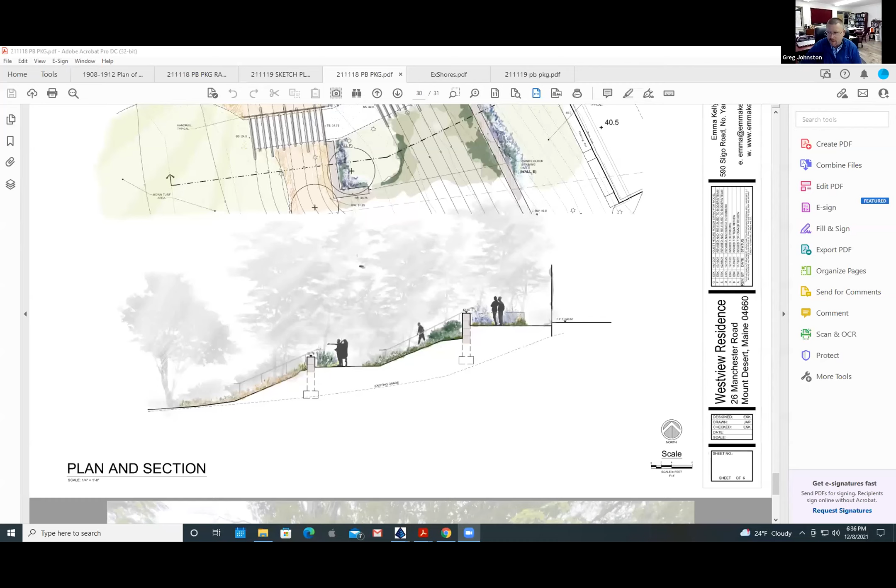Let's try that. Yep, looks good. Yep, all right.

As part of the plan, what is now a sloped area at a recently remodeled home, the general purpose is to reduce slope. By terracing, we can reduce slope, which will reduce potential for erosion, but also give some curtilage around the structure in a terraced manner.

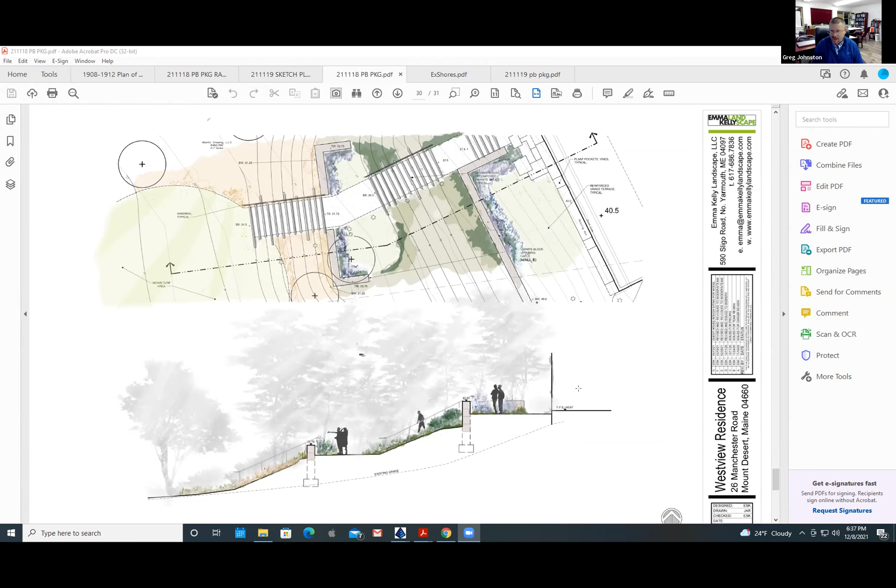The purpose we're here for is that the excavation and fill, again in the shoreline zone, requires planning board approval. The spaces also become easier to traverse by demarcating sloped from flat, and by doing so, also providing a better root base than what's there to add some native planting.

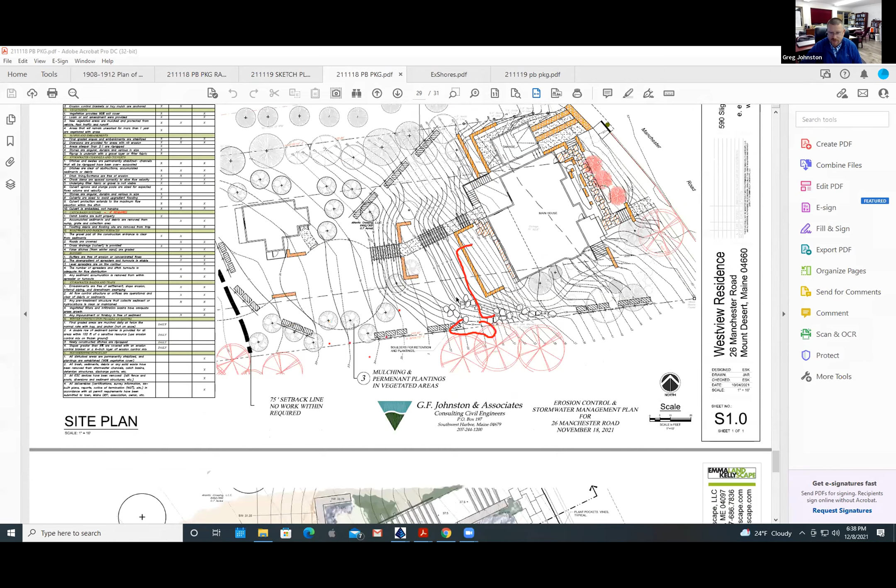And screening to increase some privacy. I'm scrolling over to what is the site plan now. You can see in orange the terraced walls we just saw in section, planted up bouldery side slope, and some screening from the adjacent property on the sides. It's the amount of fill required to accomplish it, but in the end it'll create more usable and stable space around the site.

Here's a beautiful rendering by Emma Kelly, landscape design team, showing you from probably the easterly side looking towards the west, and the purpose.

We also observed a fairly impressive system of erosion control already in place during the snowstorm. It seemed to be performing well. The bottoms of the silt fence were keyed into the slopes, and there was wood chips present. They'll continue to be diligent about those aspects, not only in installation but maintenance throughout the duration of the project.

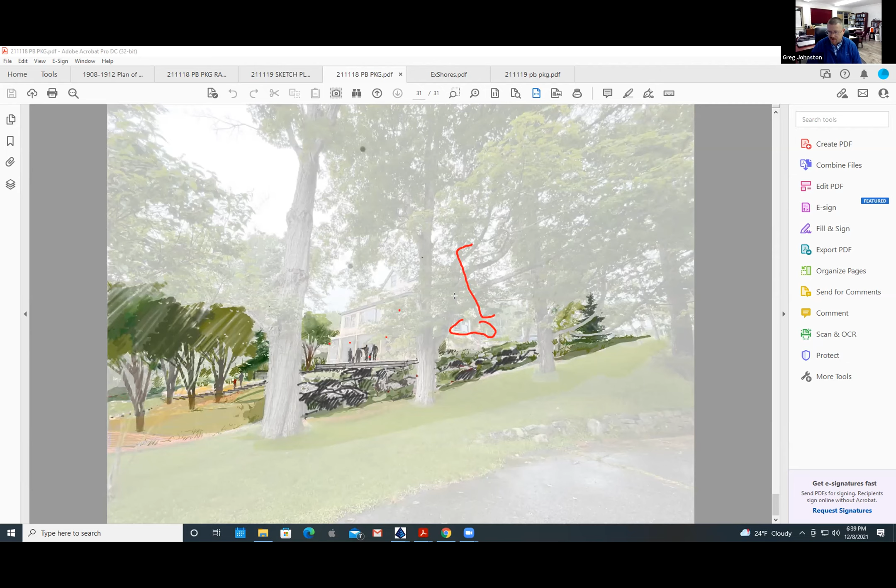Unless I missed something, I think we still need to vote that the application is complete. We skipped that. Make all other comments.

I'll make a motion to say that the application is complete. Tracy Keller. Anastasia, second. All those in favor: Tracy Keller, aye. Christy, Anastasia, aye. Meredith Randolph, aye.

And then we have to make a motion to approve the application, that will then pause. How about the public comment section? Don't we need to do that first? Well, I think that is part of the review, so we should have done this probably before. I can't remember when we did it. But I don't think we have the public review until after we are reviewing the application. No, I guess you're right, maybe we do have public review first.

So, open up to the public. Is there any public comment? Concerns, questions? Can I ask a question? Oh sure, Greg. Yes.

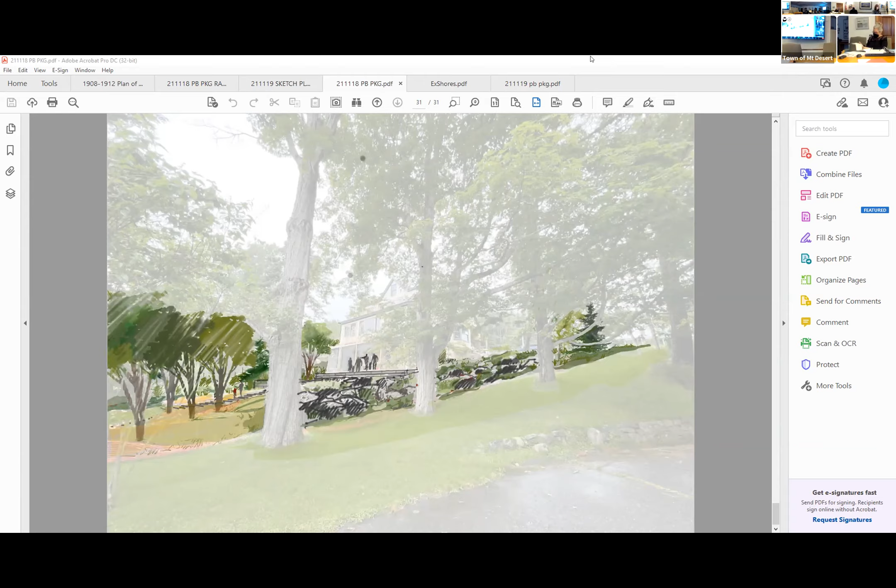So we were at, do we have any comment from the public? Any questions? Anybody else? Doesn't sound like it. Okay, so public comments closed. Do we have any more questions from the board, or do we want to vote to find it complete and then do the review, or vote to approve and do the review?

Do we have a motion? I'll make a motion to approve. Anastasia, second. Okay, let's go through, anybody want to have a vote for short checklist? Anastasia, I make a motion that we use the short form. Oh, Tracy Keller, I'll second that. All those in favor, Christy? Anastasia, aye. Tracy Keller, aye. And Meredith Randolph, aye.

Okay. So we have section 6A, 6A1, compatibility.

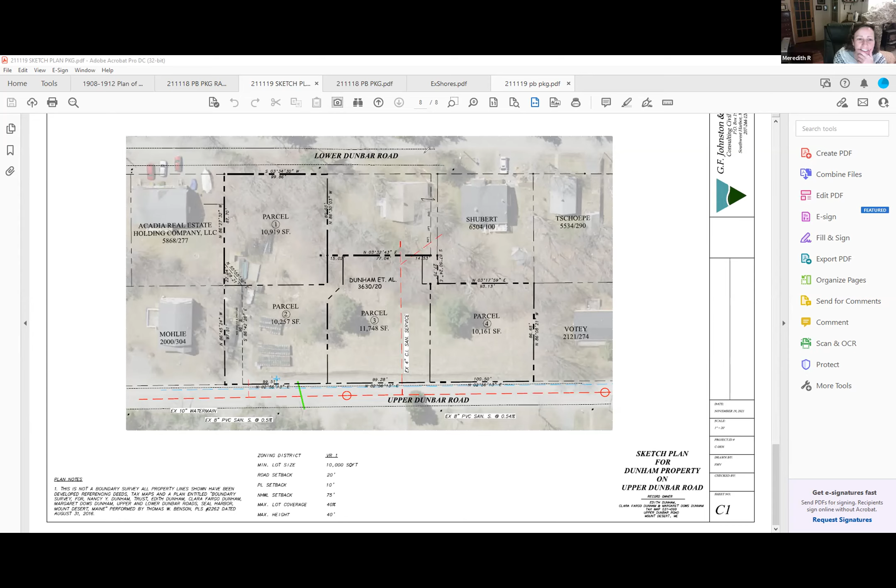So Greg, there's kind of a funny little snorkel—I was just gonna ask about that. What's the between little 1 and 3, and 3 and Shubert—there's those weird little pieces hanging off. What are you trying to get at?

So there's a desire to keep them as close to the historic orientation between the family members and the historical lines as possible. In order to keep them as close as possible, there's a bit of jockeying to get minimum lot area into the parcels, which results in some odd configurations in meeting the land area requirements. This parcel is sort of the original, yet some of the original area, which was down here, had been conveyed to this parcel—so it's more about meeting land area requirements. Simply, this line, if continued straight up, would probably not meet the 10,000 square foot increment.

Greg, was I correct in understanding that it appears to be a right of way on the south side of parcel 2, and that's how you get back to parcel 1, whereas parcel 1 is accessed from Lower Dunbar? Parcel 1 would be accessed from Lower Dunbar. This right of way is actually for sewer, shown here, that goes to this property.

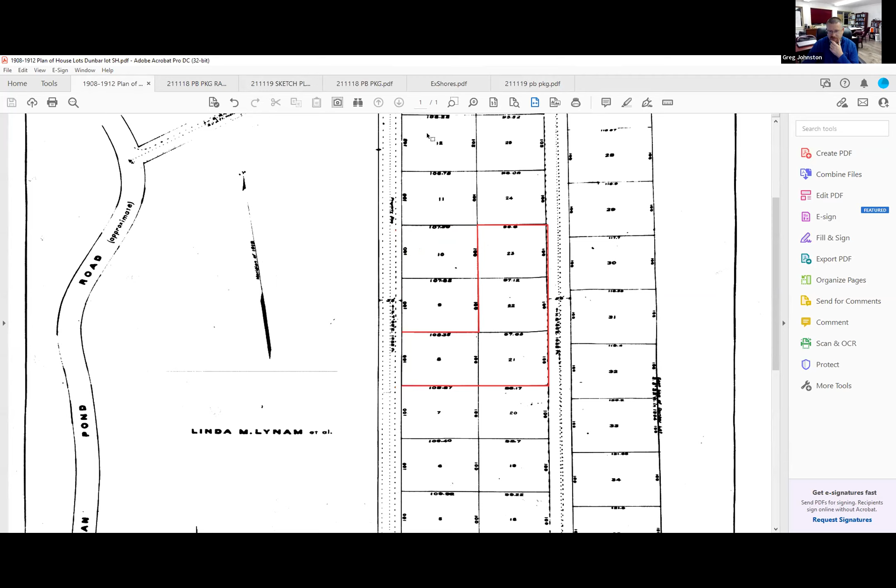So we definitely have some work to do in showing access, which is required as part of the subdivision ordinance, and stormwater management, recognizing these existing easements. But in an area where it's a neighborhood of town sewer and water, it can happen relatively consistent with what is adjacent to the properties around them, because they were historically based on this plan from 1908. A lot of the deeds in and around the properties in the area are still conveying parcel to parcel, referencing the 1908 plan. So these lots being proposed are more consistent with the neighborhood, and the large outlier 1 acre parcel is not.

So Greg, is it helpful? It seems to me that we've had discussions in the past with subdivision plans as to whether you need to be labeling the name of the property owners across the street. I think that's good. I don't know that everybody needs it, but it seems to me they're a legitimate abutter, so it needs to be clarified.

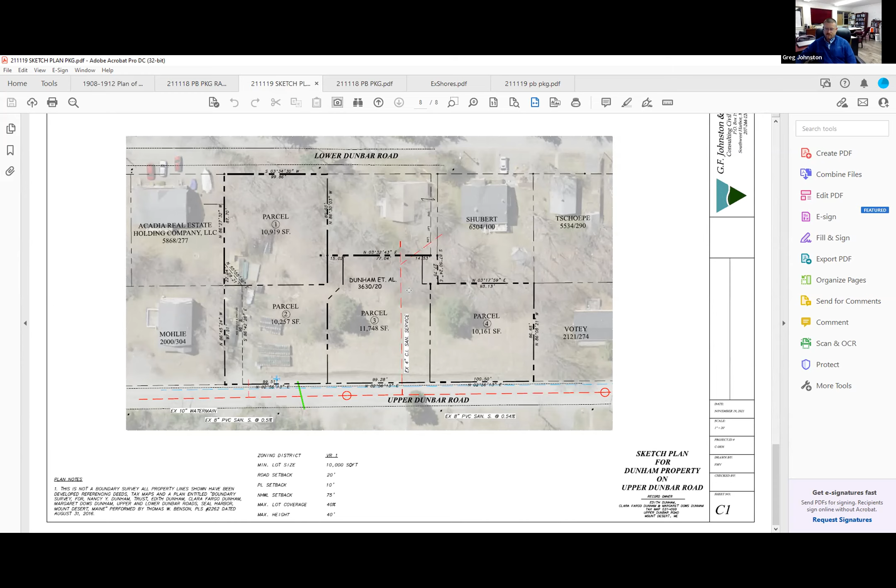Anybody else? Comments, questions? I'll ask if there's any public comment. Not hearing any, and this is how sketch plans usually play out. We just kind of generally talk about the project and continue on with the process from there.

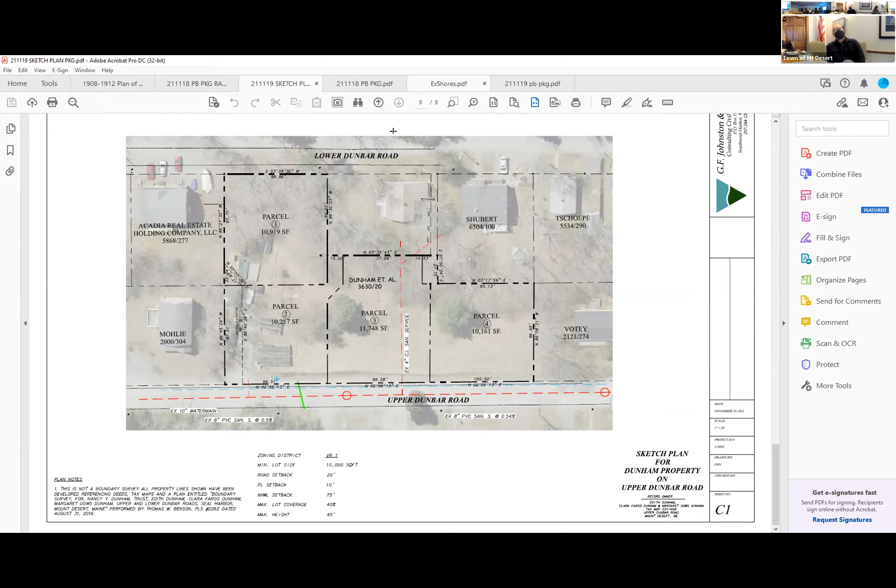The process being then completeness and compliance review, and those will be at later planning board hearings. So I feel like we're all set. Thanks, Greg. Okay, thank you.

And I think we may be seeing you later tonight still. Maybe one more time. I was told to do it in one large dose and not show back up again for the rest of the winter, so that's what I was trying to do. Got it. That's how it was taken.

All right, let's soldier on here. You guys gotta bear with me here, gonna read through this. We're on item 5 on the agenda tonight. Oh, 5, Roman numeral, okay, sorry, go ahead. Yeah, we just rounded out 4, the subdivision approval applications, and now we're on to 5.

We've got land use zoning ordinance, section 6B, lots and access. What that talks about is that no lot may be built upon or otherwise developed unless it has a private road or driveway for access to a public way by a valid right-of-way benefiting the lot, or by ownership of land abutting the public way. If more than 2 lots are accessed by the same private road, then it must meet the street design and construction standards of section 5.14 of the subdivision ordinance. If no more than 2 lots are accessed by the same private road or driveway, it must meet either those street design standards or the driveway construction standards of section 6B6 of the land use ordinance. A pre-existing primary access drive that serves up to 2 existing lots need not meet the requirements of section 6B6. All lots must maintain safe access for fire, police, and emergency vehicles as determined by the fire chief.

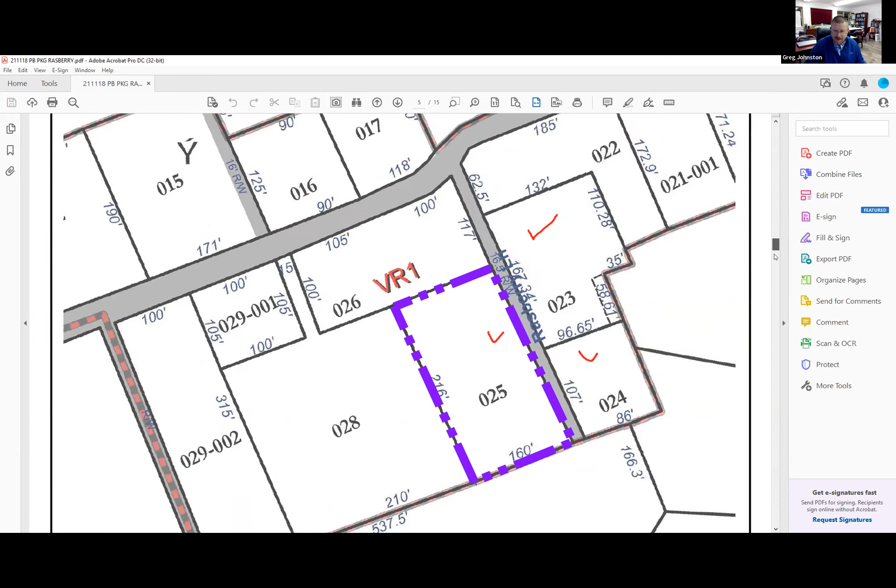This is the location map. Probably go, if we're looking at the way in—the trees which are, sorry, trying to find my controls here—the birch is within the right of way. It's not in great health; it would have to be removed. These other ones are outside, and prior to this photo, in the foreground, there's another tree that's outside.

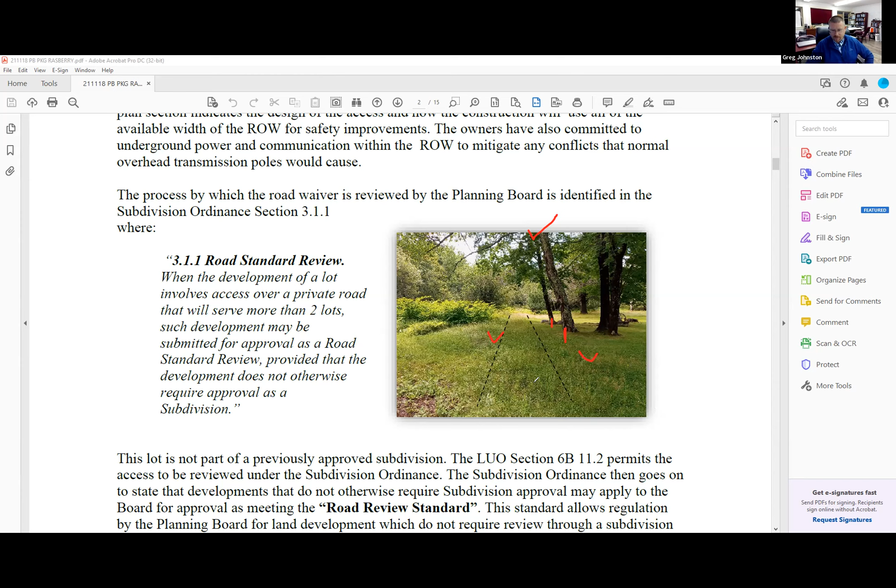In order to meet the safe entry requirements, we would have to limb the ones that are outside the right of way, but remove the one that's inside the right of way. That is part of the programming. I'm going to scroll through to just get some other pictures before we get into it.

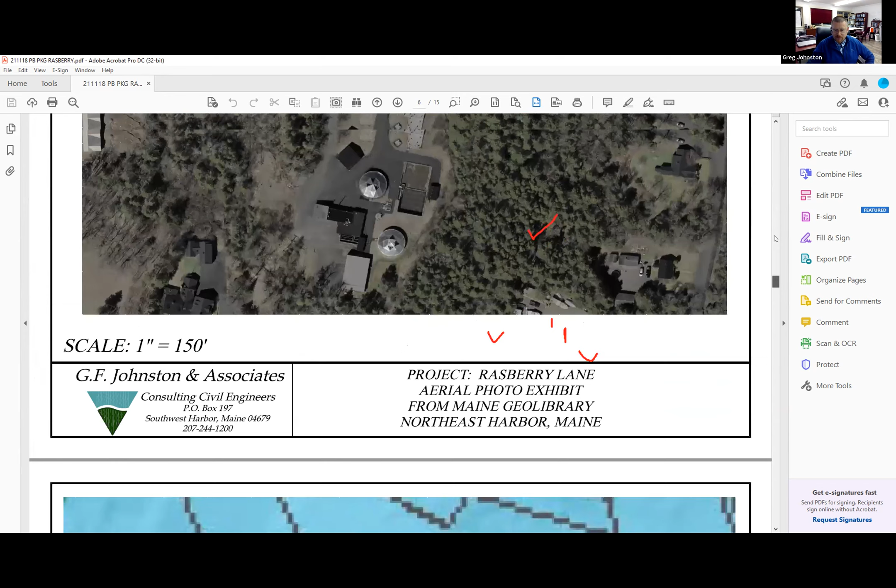Here is the site aerially. This is sort of looking back up through the road from inside towards Sinclair. Whoops, I'm losing the ability to control the computer. So we have the birch that's in here and the other trees which are outside of it.

Now, the purpose of it is that strict compliance can't happen. The ordinance allows a road waiver if you physically can't construct a 22-foot wide road on a 16.5-foot right of way. So strict application of land use restrictions prevents the work from bringing into compliance because you just can't fit a 22-foot wide road. And then there are physical conditions.

The safe access provision for driveways is a 12-foot travel surface, which can occur. The purpose of doing test pits, we think, is there's a good gravel base that can be used to build the road. We're not going to have a lot of fill, so we feel that we can relatively contain the improvements of the road within the right of way.

And then the commitment, if you think about access to a driveway in a narrow access, 16.5 feet wide, the fire truck's requirements are 14.5 feet clear horizontally and vertically. Those spatial requirements compete with power poles. You can't really have 14.5 feet clear, a 16.5-foot right of way, a power pole, and a fire truck all in the same space. So to mitigate that, the owners have committed to sort of underground power.

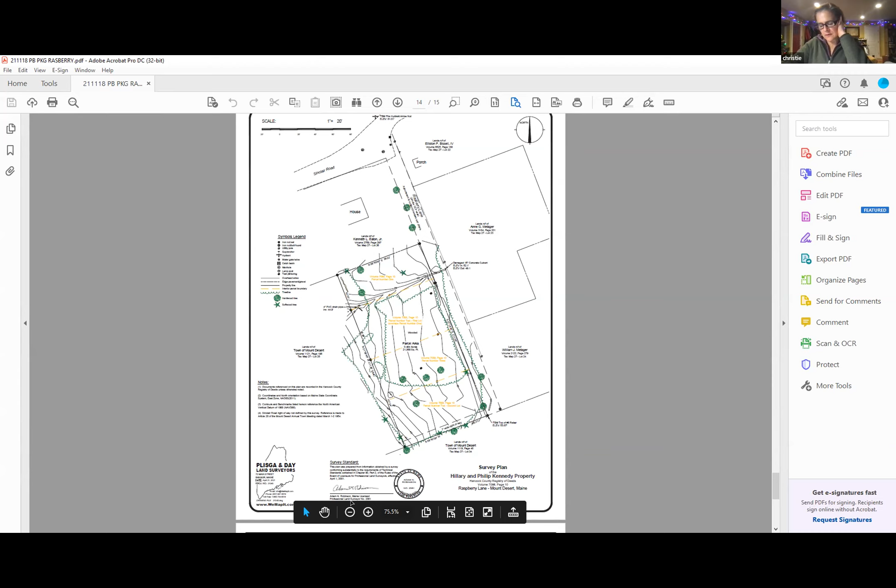What do you think, Christie? Not to put you on the spot. I mean, I didn't go to the site visit, so I have to apologize for that. So I don't have that situational awareness of the site, but I do agree with you that, as much as possible, we want to nudge towards compliance and not waivers.

What do you think, Meredith? You look deep in thought. Oh, yeah, I mean, I get what you're saying. I guess Greg can go ask if—that'd be the Eatons—if they'd give them a wider right of way, but I just don't see any reason why they would.

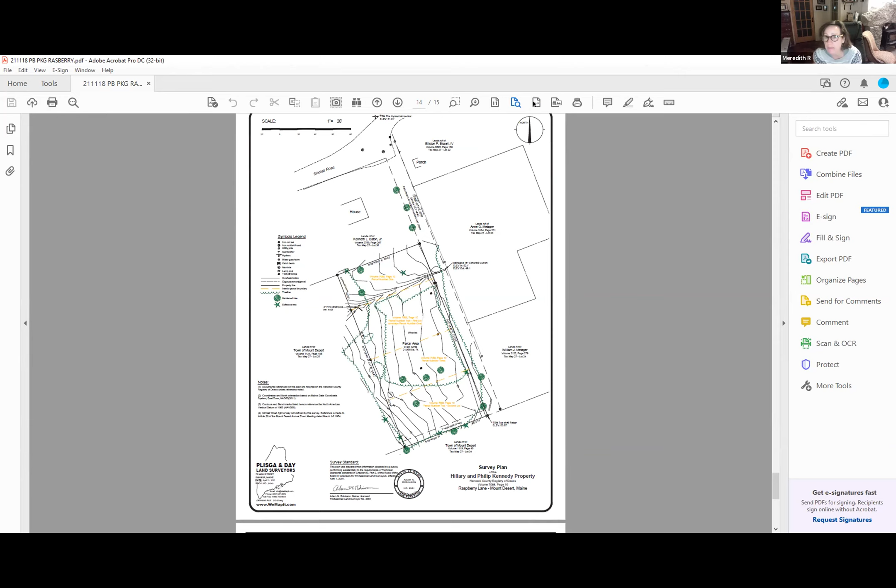And the other thing—so the backside is owned, the backside's the sewage treatment plant. I guess that was my other thought: if it's safety and we want compliance, is there something the town could offer? I think it would be more reasonable to go to the town, since it's just a sewage waste treatment plant, and give them access to the lot over the town. So all sorts of opportunities on the town lot there to give them safe access to the lot, if that's what we're after.

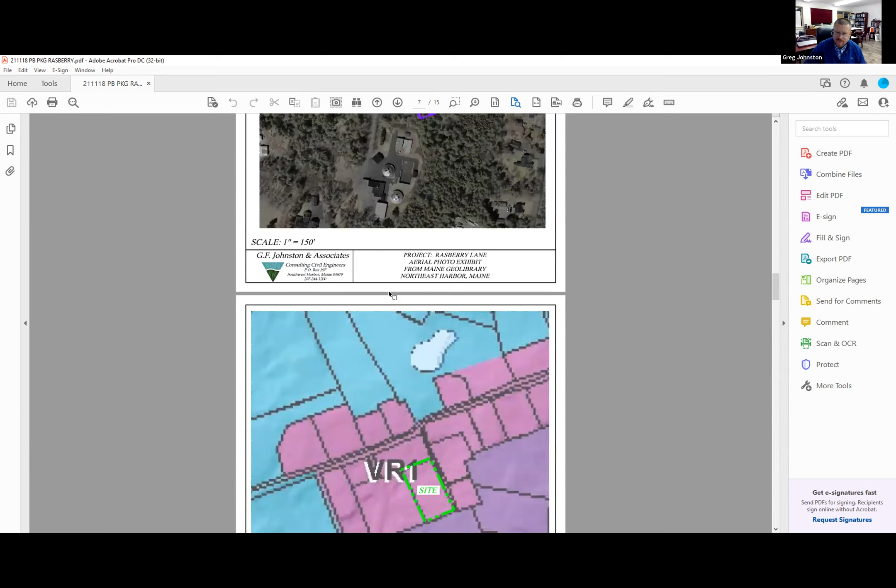Greg, I just think that if there was an attempt made in approaching the Eatons, and if they say no, that an agreement can't be reached on widening that, I think it just strengthens the foundation of the waiver request, given—I just have to humbly say—the lack of site challenges with this one.

So I'm hearing, and I want the board to know I'm listening to them. And so I do want to just clarify a couple of different things about that request before we carry on. The request of the right of way—let's think about or expand upon—should we obtain, I don't know, a 50-foot wide right of way?

What would the subdivision ordinance say? You need a 50-foot wide right of way and a cul-de-sac at the end of it. So if the goal is compliance, are we looking for a 50-foot wide right of way and a 22-foot wide road, a road which would be wider than Sinclair Road? I'm actually just making sure I'm clearly understanding.

If we've exhausted options, I'd like to know what we are going to be asked to construct, because I am sensitive to legal aspects of right of ways. I hear the board wants to nudge towards compliance, but I'd like feedback, since we haven't pushed hard for a 50-foot wide right of way, because for a single family residence being permitted, that driveway could fit there. Other than the fact there are other undeveloped lots, for this lot it could work. So maybe you could discuss expectations on the construction side, which might inform how we approach this, and help us address the abutters or anyone else regarding the board's concerns.

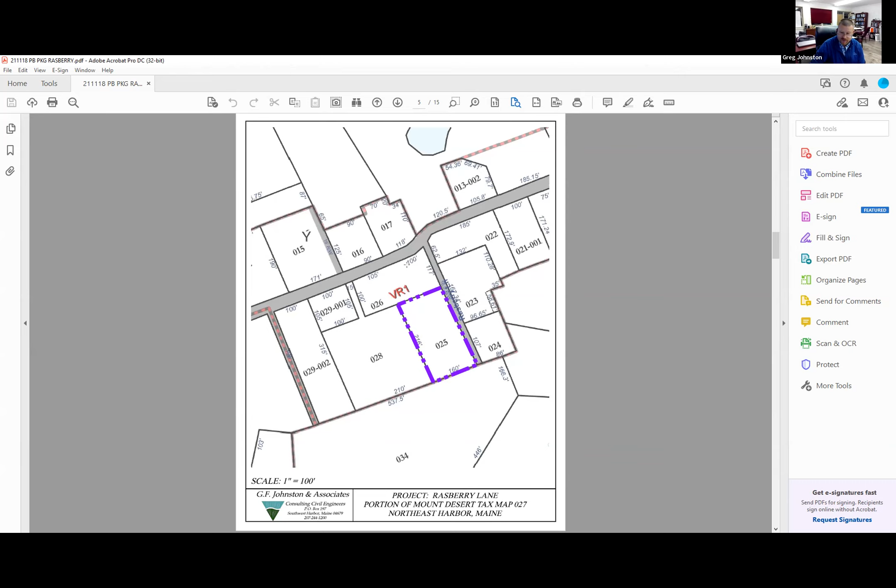One thing we want to get away from, and I know you guys do a lot of planning, is that a lot of the road standards are antiquated or they're cross-referenced from new subdivisions. In roads and neighborhoods, big, wide, cleared gravel roads is what we want to avoid. So if we can determine that it is as much as feasible, think about creative ways of not creating a big gravel open space.

I understand what the board is, and that's our goal. In past board approvals of waiver requests, it's still a human process, and we've taken into consideration the context of the road waiver request. Obviously, we've had instances where full compliance just doesn't make sense, where it's out of scale, out of character. We push towards compliance as best we can, but some of those subjective characteristics of the road design and the context it sits in have significant merit.

Understood. And we have, Bill had the experience of where in a road waiver, the portion where the right of way was wider, that portion of the road was widened. And where the right of way was not and could not be obtained, the road was narrowed yet was acceptable. So I think that seemed like a pretty reasonable approach.

So I hear what the board's saying. If we would be able to provide the additional information requested by the board, and a proposal that reacts to that, we'll act accordingly.

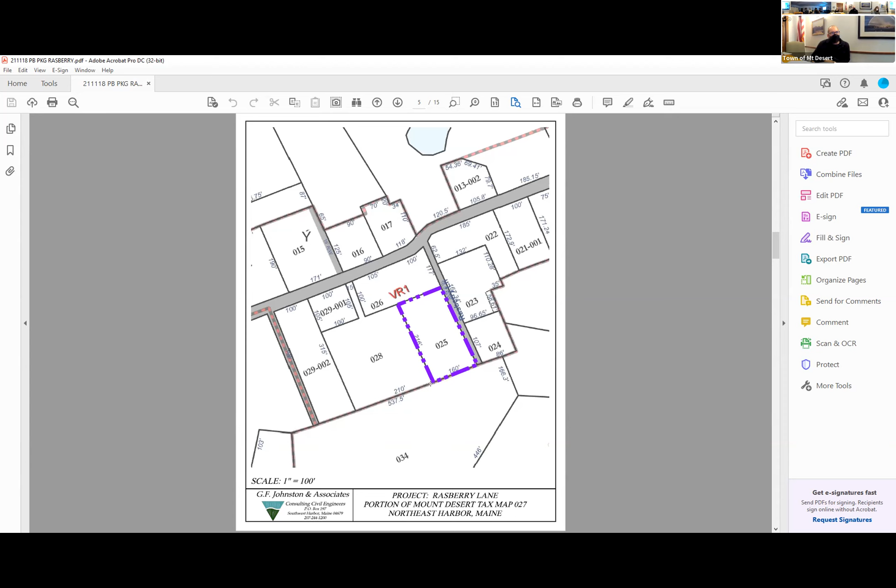Thank you, good evening Planning Board. We are Bill and Ann Metzger, and we are the abutting neighbors on the other side of Rasberry Lane as it goes back and serves our two lots. We want you to know that we are very respectful of your consideration of the proposal. We are in support of Greg Johnston's request for the waiver. We believe that the road is historically sufficient and would be sufficient going forward.

We appreciate that codes change for municipalities over time, and so you have different regulations to incorporate, but we feel that both for the continuity of the neighborhood, the integrity of its modest and remote access off Sinclair Road, and the historic trees on the Eaton lot, which are quite large, if something's going to be widened either by right or by construction, we would lose some of the lovely vegetation that's there. So thank you for including us.

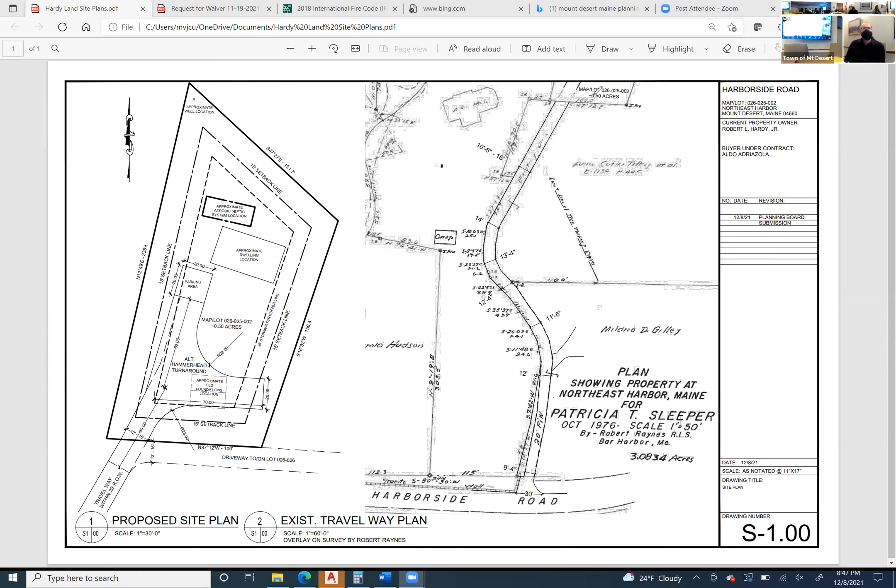And the decision to be based on that, including the septic design information, and if any modifications the fire chief is requesting, what that actually translates to on plan. Margaret, that's always the burden of the applicant. I understand. One thing I would like to bring up, though, is the issue of such things as the septic and the siting of the home.